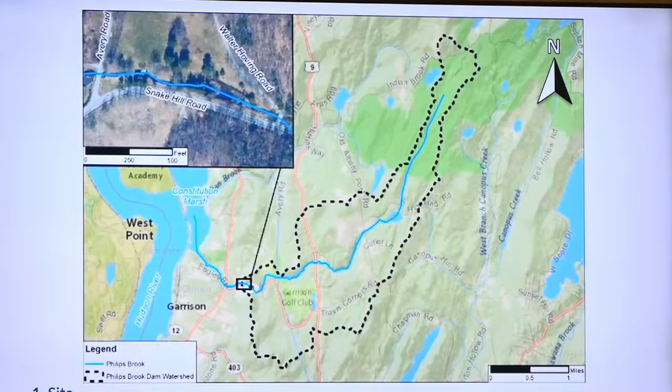This is a close-up of the project site. Again, the river is flowing from the right side of the screen to the left. The bridge going to the Walter Hoving home is shown on the right side of the screen there. And you can see the dam is indicated by the word dam, which is small. It's right around station 500 in the middle of the screen.

Wish I had a pointer.

And that's the main focus of this particular project. However, there are 3 other stone weirs along the river between the dam and Avery Road that are also failing. Those are small barriers, small dam structures. And there's stone walls all along the edge of the river. So the dam is about 10 feet tall. The current channel within those walls is about 15 feet wide. And this project encompasses about 800 feet of river channel.

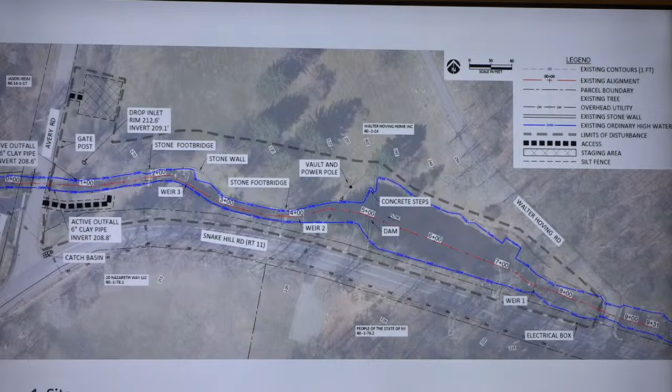And this is the reason that Beth and her organization approached us to look into options for this particular site, to remove the liability and risk. When you say that the dam was loaded with cobble, silt and gravel, do you mean the pond behind it, or is it pushed up against the dam? And does pushing it up against the dam risk the dam or reinforce the dam?

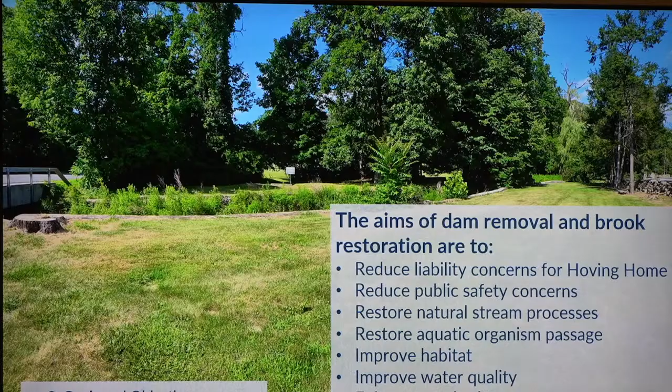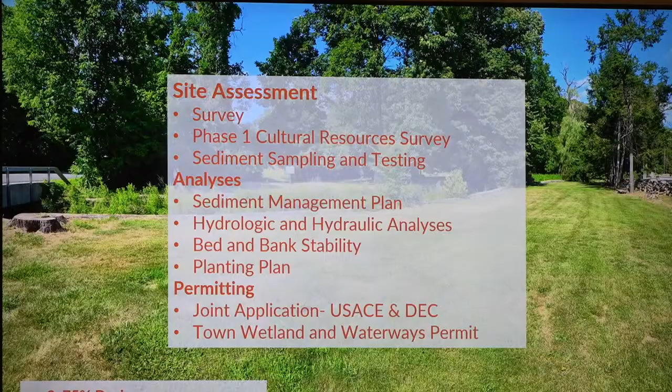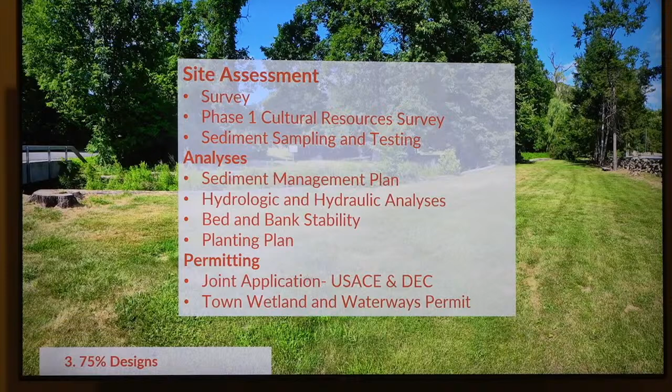A few of the things that we've been doing over the last few years is conducting topographic surveys. We've subcontracted with cultural resources professionals to review the site for historical and archaeological sites and sensitivities. We did some sediment sampling of the material behind the dam. We have done a whole bunch of modeling of the water, where it's going to go, at what frequency, how high it's going to flood under existing conditions and proposed conditions. We looked at evaluating the planting plan that we should have on this site afterwards, and we've been going through some permitting over the last couple of years.

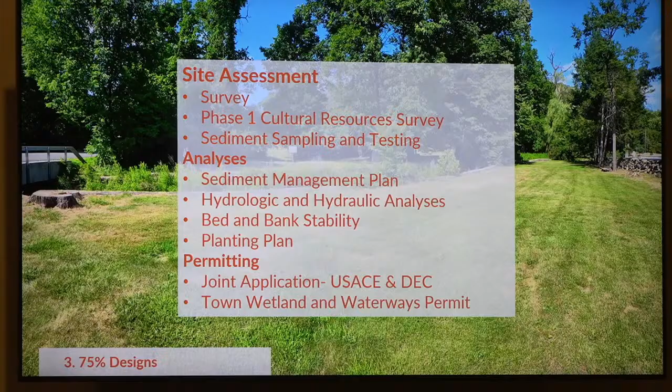Looking at the design itself here, this is sort of a funny picture here that I'll try to interpret for you. Again, Philips Brook is flowing from the right side of the screen to the left side of the screen. The dam is pretty much in the center of the image there. And those funny little cells there, those are step pools that are being proposed for the river channel. And I'll show some pictures of what those might look like in a minute.

But those are essentially boulders that are creating steps in the stream system with pools just downstream of that. So this is a system of riffles and pools, steps and pools, similar to what you might see in a natural steep system upstream of this site, very similar to those conditions. And this will allow water to flow through the river system and the energy to dissipate in these pools as it flows over the steps.

The channel banks will be constructed of rounded stone. I should note that the rock being put into these steps and along the channel banks and the channel bed is rounded river stone, cobbles, boulders, gravels, not big angular riprap. We're trying not to riprap the stream here, but more stabilize with material that you see upstream of the Walter Hoving Road bridge there.

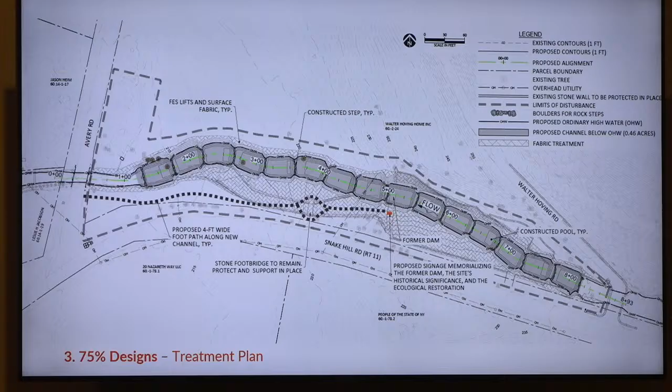There's that nice stone footbridge over the stream right now. The stream will be filled in, but that stone footbridge will remain, and the trails will work around that so that that is a feature of the site. Part of the coordination with the historical committees is to retain the walls of the existing channel. They're just going to be buried in place. There'll be a small portion that'll still be exposed above the fill area, but those walls will not be removed per their request.

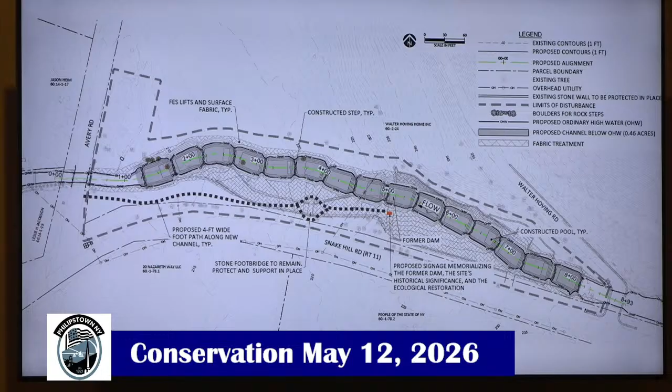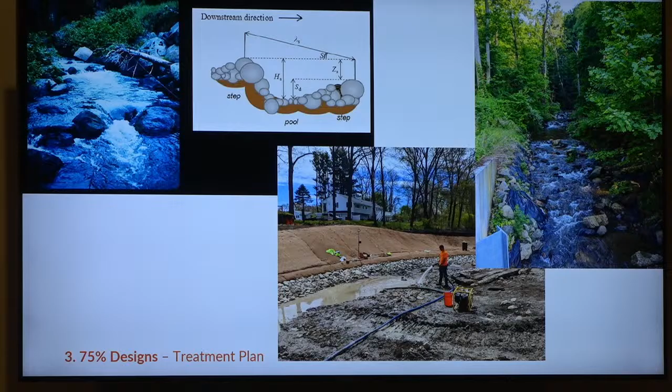Okay, so that's kind of an overview of the designs. I know that many folks might be interested in some of the flooding and flood modeling and what the impacts of the dam removal might have on this system. We do flood modeling for all of our dam removal projects, and sometimes it goes the way you might expect it to go. Other times there are interesting results that come from it and surprises that come from it.

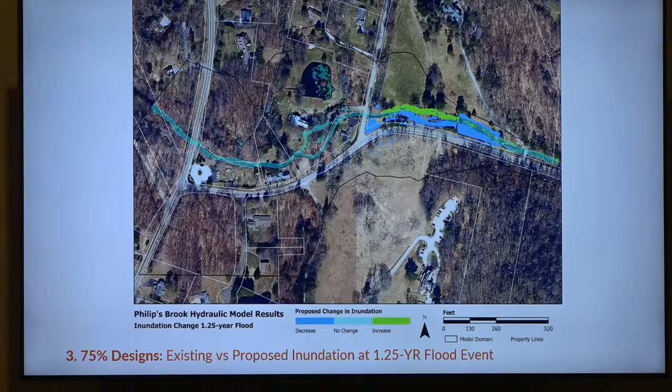And the colors up there in the map show the sort of light blue or sky blue are areas that currently flood, and there'll be no change in the lateral extent. So the extent of flooding on the north or south side, left or right sides of the stream channel. The green color is where you would see an increase in proposed conditions in the flooding extent.

So upstream of Avery Road here, you can see that there's an increase in flooding extent where the new channel is going, and a decrease where the old channel is being filled in, which is obvious. At this particular flood event, there's no change downstream of Avery Road. You'll also see that there are some areas outside of the stream channel in darker blue, and that's again decrease in flooding extent.

So see a few polygons along Snake Hill Road. So at this particular flood event, there's no water flooding over Snake Hill Road. This particular dam, it turns out, is in a spot that when it floods, it pushes water out onto Snake Hill Road and over to the south side of Snake Hill Road.

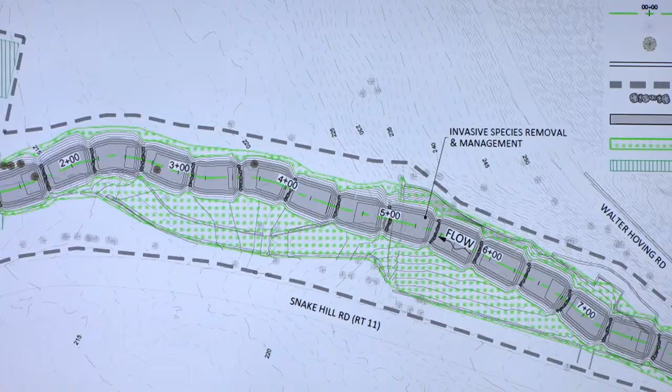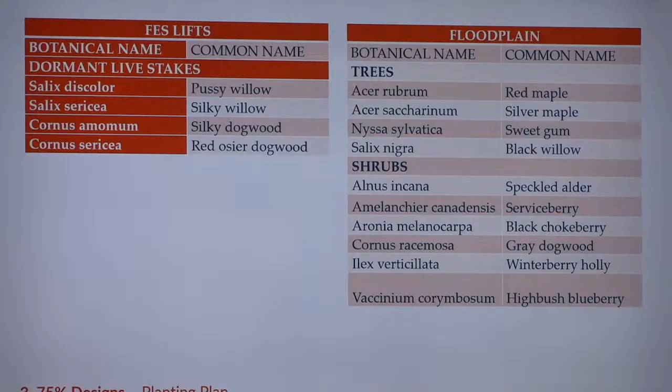Wrapping things up here, planting plan, we'll be planting the channel banks and the floodplains on either side of the river channel. Along the channel banks will be the FES lifts, the fabric encapsulated soil lifts, those biodegradable fabric lifts. We'll be putting various species of willows and dogwoods in there through live staking, and there'll also be some native seed planted in there. And then on the floodplains on either side, a range of trees and shrubs to populate that area.

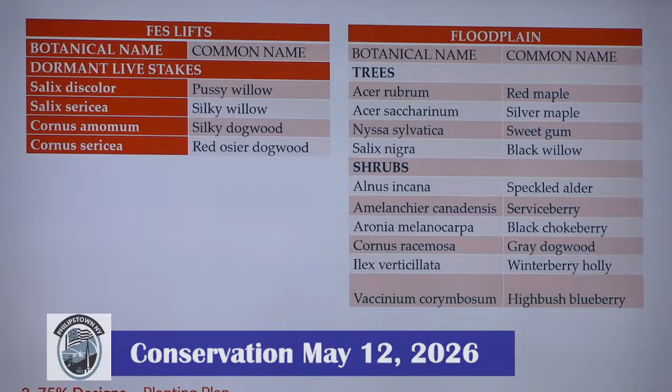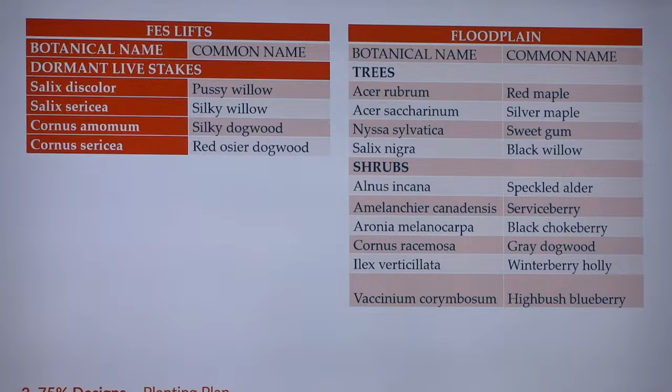It's going to be a mix of native plant species through this area. We will try to retain as many of the nice large trees that are there right now. There are a couple that do need to come down to construct the new stream channel, but most of those trees will remain. Again, impacts about 800 feet of the new stream channel, filling in about 300 feet of the existing channel. Overall, less than an acre of stream impacted by the project.

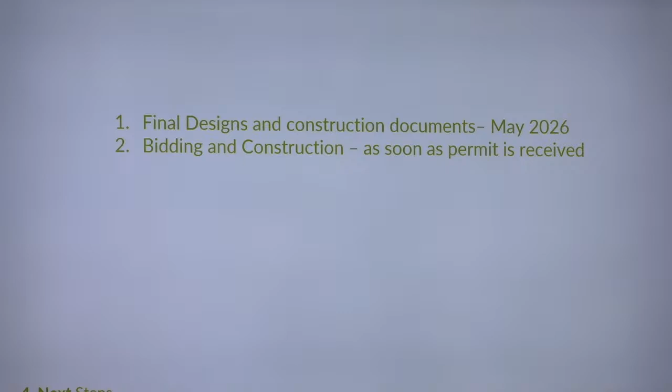We're finalizing the designs now and construction documents, and funding is in place, ready for bidding and construction as soon as we are able to receive the remaining permits. And with that, I will open up to questions. And Andy, I don't know if you want to take questions from the board first, or... Let's do questions from the board, and then we'll have SLR, who we had hired to do a peer review of the modeling.

So I have a couple questions, just more to understand the design of the new bank. So I understand the steps, and that makes sense to meter the flow and to kind of reduce the inertia of flowing obstacles or material in there. But the side of the banks dictates the volume of water that flows within the channel, and then at some point it overflows, and that's when you start to see your 1-year to 10-year flooding. That's right. So how do you optimize or design the height of the banks?

Ideally you could make them super tall, and then 100% of the volume under a 100-year storm would stay, it would be a huge tank. Right. But then it would all go to the Avery Road culvert, which obviously wasn't designed for that kind of volume. So how do you balance the design of the walls for the new channel against the places where it's going to spill over and start to flood out in certain areas, like you really nicely modeled? Yeah. But I'm just trying to understand, how do you ensure that the model you built electronically then gets physically enacted when you get into the field?

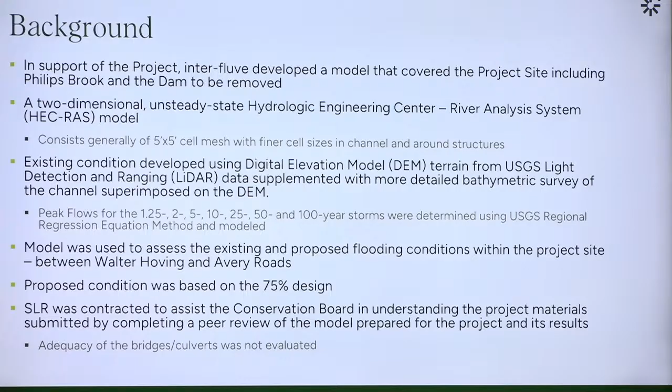In our peer review, SLR ran the model to ensure the accuracy of the output for existing and proposed conditions. Just for point of reference, the existing condition model took about 41 hours to run, and the proposed condition took about 31 hours. So it's a long process. There's a lot of data. We hit start, walk away, and come back on Monday after starting it on Friday, and usually the modeling results are there.

As part of that, the model ran as we expected. The model captures the Philips Brook floodplain and the inflow-outflows within the boundaries. So the model encompassed everything one would expect in this kind of a model. Model break lines were correctly defined along the significant features, the walls and roads. That's really what gives you some of the accuracy you're looking for in the results.

Land cover and roughness coefficients: when you run these models, you've got all these characteristics. You've got a channel, trees on the side, vegetation, maybe some roads, and there's a way to determine that land cover by observation and come up with roughness coefficients that you put into the model for better accuracy. The methodology for bridges and culverts, as we saw it, was appropriate for what the model was to accomplish.

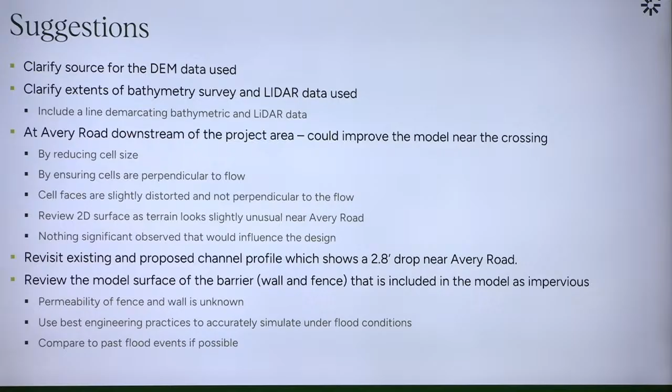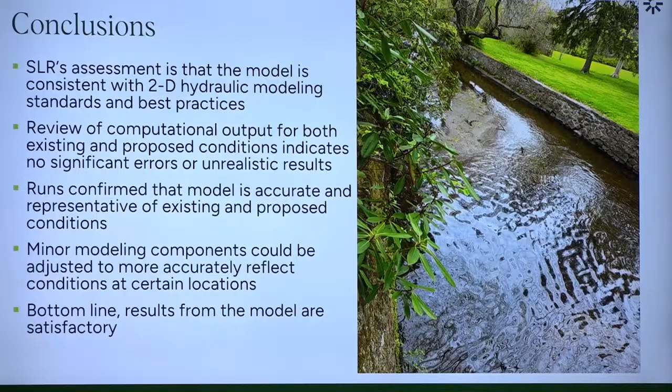Conclusions. Our assessment is that the model is consistent with 2D hydraulic modeling standards and best practices. The model that's selected was appropriate and it was run accurately. Review of computational output for both existing and proposed conditions indicates no significant errors or unrealistic results. Runs confirm the model is accurate and representative of both the existing and the proposed condition.

And as Nick had mentioned, there was an existing condition that was run. The proposed condition is based off of that, so the fact that the existing condition model run was accurate means that your ability to get accuracy out of your proposed condition is greater. As mentioned, there are minor modeling components that could be adjusted to more accurately reflect conditions at certain locations, mainly Avery Road crossing. And the bottom line, results in the model are satisfactory.

Thank you. Do we have questions or any comments from the board? So, a nice summary. With these types of models, you have to make certain decisions and assumptions as you're putting the data into it and designing it, is the way I'm reading it from your summary here. And your team has looked at their model in detail, both the model's design and the parameters that go into it and whether they're suitable or not, right? So you're assessing the quality or the best practice of the model itself from a peer company. Would that be a fair assessment of how you look at your analysis?